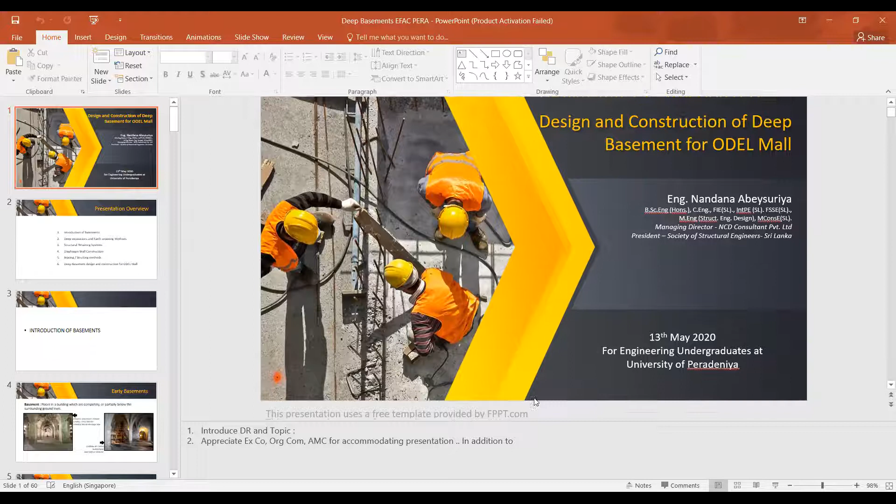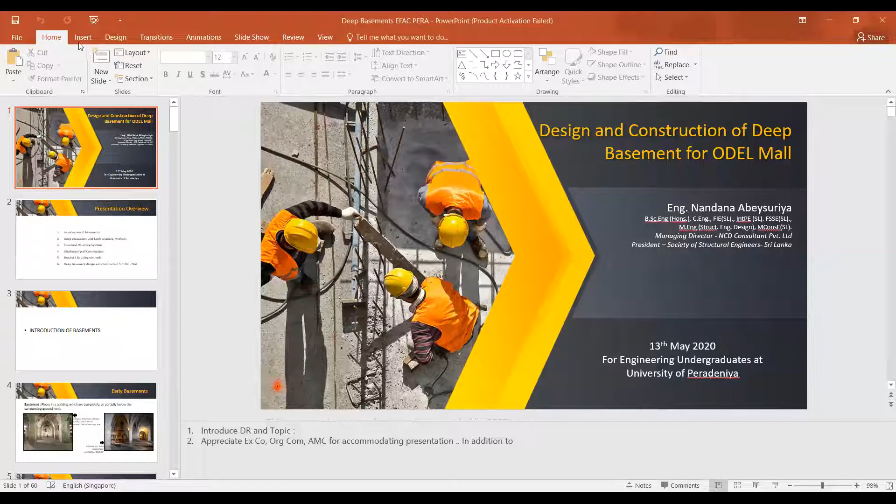Give me a few minutes. Slide show is not working. Maybe... okay, no, that is fine. Okay, can everyone hear me?

Very good afternoon to all of you. I know today the forum is about the undergraduates and also the practicing engineers, so I will mainly focus on the undergraduates, but this is very useful for everyone.

Before I go into the topic, I would like to have a little discussion with our students. Please note that this is not a lecture, and I'm not going to ask any questions at the end of the presentation, so you can be relaxed and listen to my speech. Once my presentation is over, if you have any question, you can ask also.

I'm sure all of you are waiting to complete your degree and then start your career as an engineer. Some of you may do higher studies, and majority will practice as engineers. Out of them, some may work as structural engineers, and again the majority may work as construction engineers and various areas in civil engineering.

I would like to share some of my experience and also a little advice, because your entire career will depend on the first job you are doing. I have a lot of examples, so you must try to select a good job. When I say good job, basically it is not the salary but the experience.

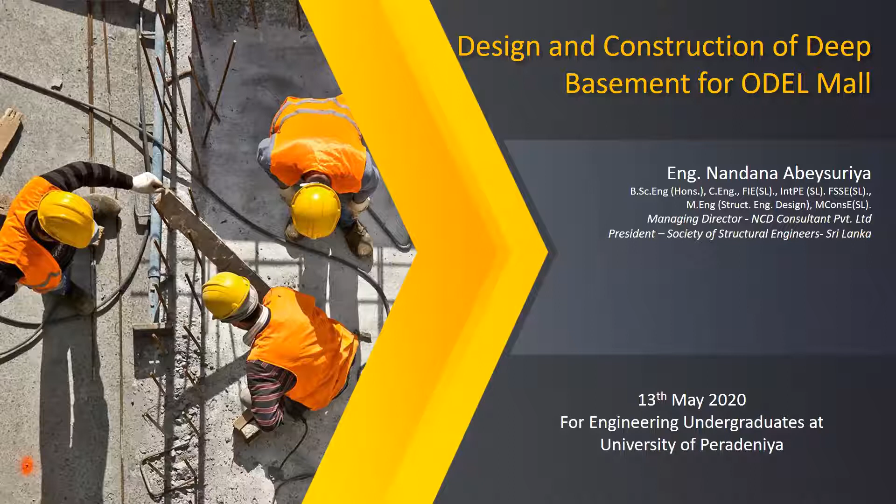Because we had not seen any 5-basement buildings in Sri Lanka, we had to go overseas and see how they do it. We went to 2-3 countries where they do this type of deep basement, but we can't do a one-to-one construction here because our conditions are different — the soil conditions are different, the regulations are different, the equipment available is different, everything is different compared to other countries. So when we got this opportunity, we did a thorough study on the constructability and the theoretical design part as well.

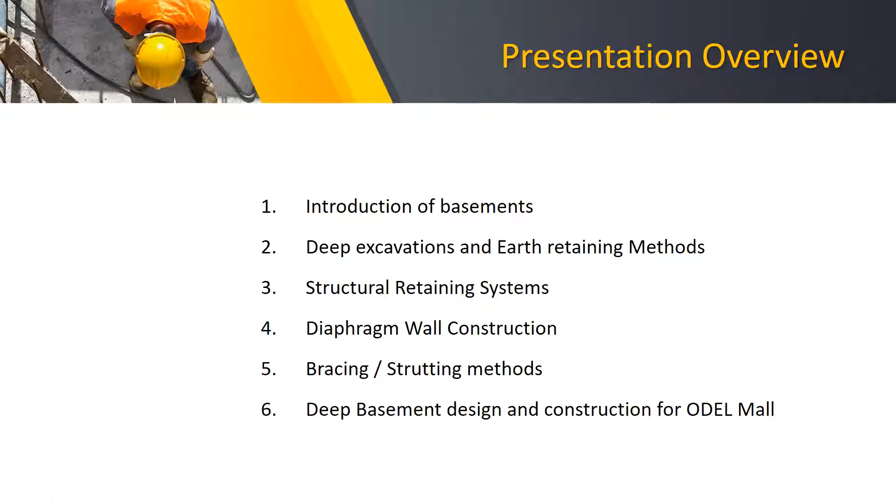For my presentation today, I would like to follow a few steps, though I might miss a few things. Before I talk about the ODEL construction project, I would like to talk a little about related areas and topics so that you will understand when I'm talking about the ODEL project. The first item is introduction of basements. Item 2 is deep excavation and earth retaining methods, then structural retaining systems, then diaphragm wall construction — that is the most important part — then bracing and strutting methods, and finally deep basement design and construction for the ODEL Mall.

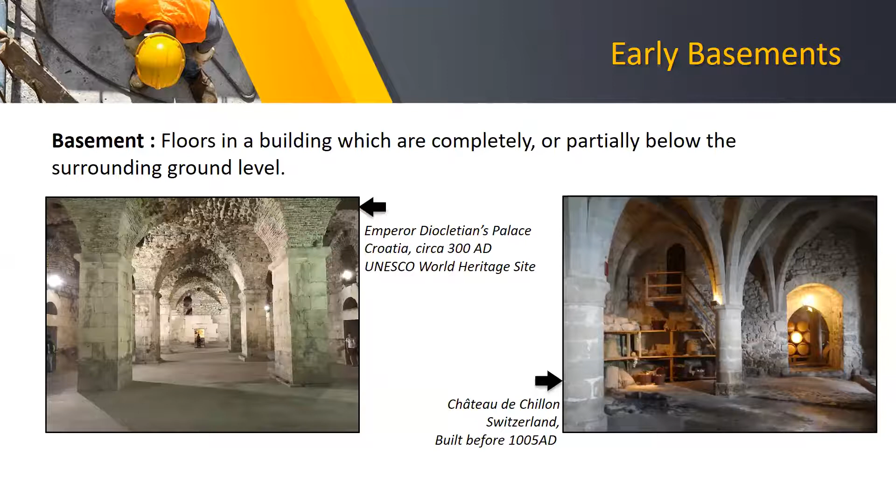So you know how the technology and the construction is happening outside this country.

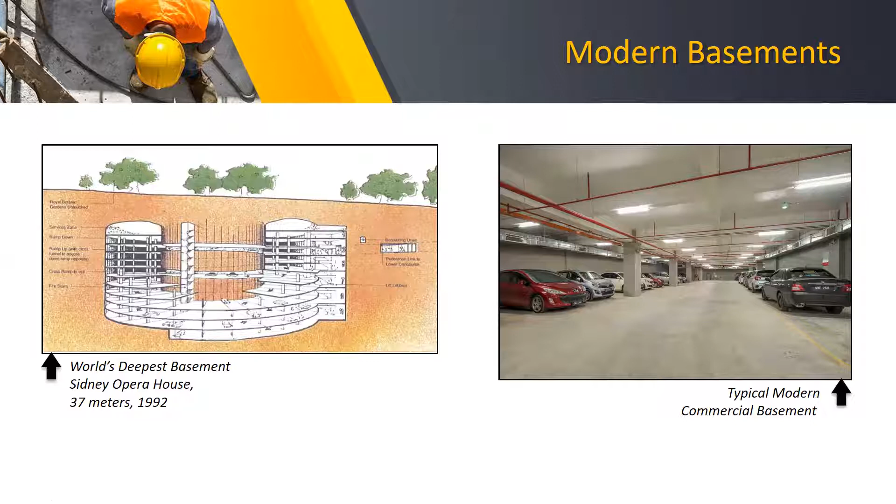When you talk about basement, the construction of the basement itself is not the difficult thing. Actually the difficult part is the earth retention systems. Before we do any excavations, we have to do protection of the outside.

To protect the outside, we have to do some retaining wall system. Those retaining walls could be temporary or permanent. Because when you excavate, you will have surrounding properties, you may have buildings nearby, and any slightest movement during the excavation phase can cause settlement to adjacent properties.

So it is not a simple approach. Therefore, when you talk about deep excavations, there are major considerations. I hope you understand what I'm trying to explain.

One is safety and stability. This safety and stability is especially important for the surrounding properties as well as people working in the basement. You may have seen in newspapers the collapsing of some shoring systems, retaining walls, and people have died - that is because the retaining wall system provided was not sufficient.

So the number one is safety and stability. Stability doesn't just mean there's no collapse, but stability of a building depends on the slightest movement, the slightest settlement. There are guidelines given for what is the maximum allowable settlement and movement, so when designing our retaining wall system, we have to consider all these things.

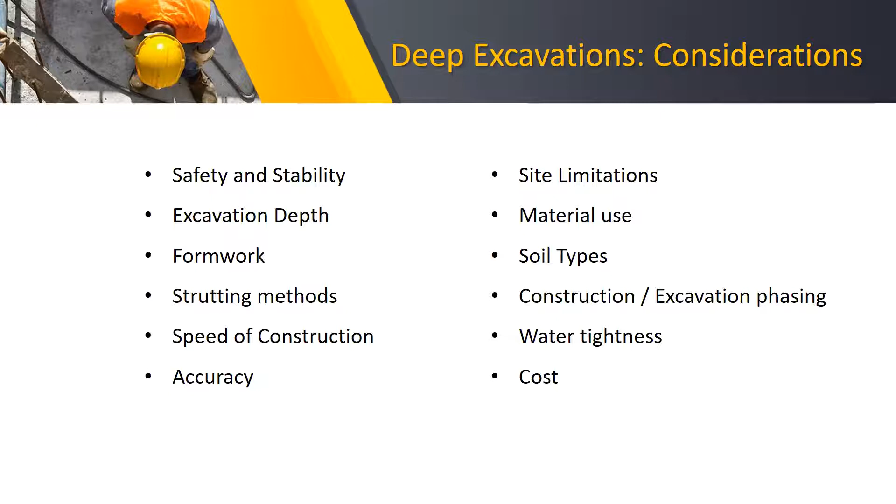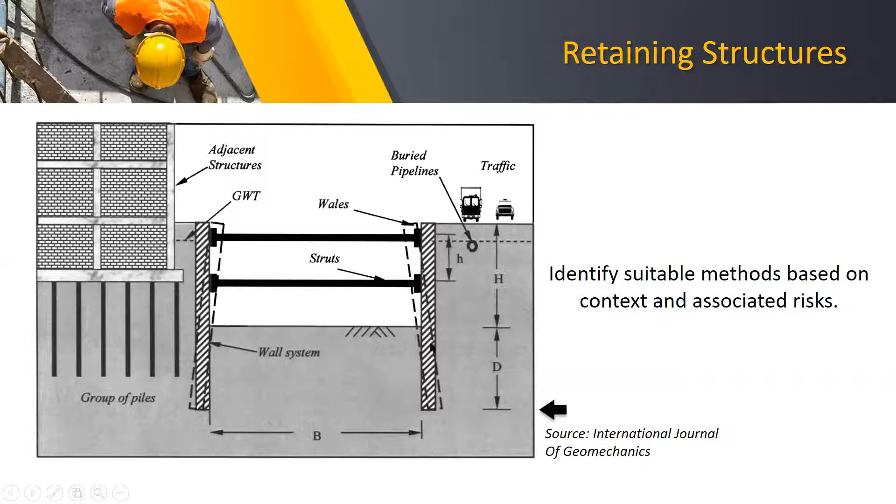We always learn from failures. This is Nicoll Highway in Singapore - you can see the scale of the damage. On the right hand side, an entire foundation has got exposed because of the failure of the retaining wall system. This building was built on the filled area, so when the retaining wall fails, this is what happened.

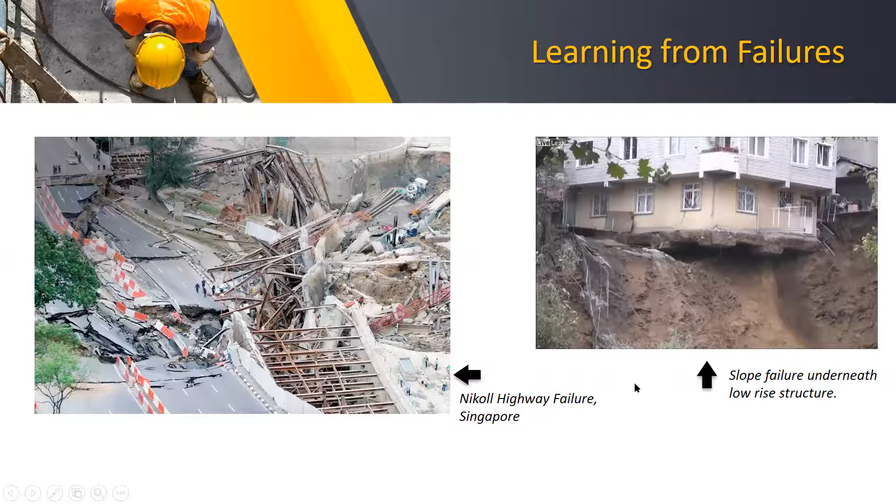After the Nicoll Highway failure, Singapore set up certain requirements. In Sri Lanka, we have not incorporated this into our regulations. I have pushed several times, but it has not happened yet. We are still trying to get all these minimum requirements established.

In Singapore now, all permanent or temporary building works involving excavation depth of 1.5 meters deep have requirements. If your excavation depth is less than 1.5 meters, about 5 feet, there is no issue getting plan approval. If the excavation depth is between 1.5 and 4 meters, a qualified person - a qualified structural engineer - should design the temporary supporting system, but an accredited check is not needed because it is only 4 meters.

But if it is from 4 to 6 meters, a qualified person should design it and submit a design report with the support system to the plan, and you have to analyze and see the deformation - I will discuss this later - and the stability of the system, which should be checked by an accredited checker. That is to make sure that even if the qualified person has made a mistake, it will be checked. We are keeping zero tolerance for mistakes.

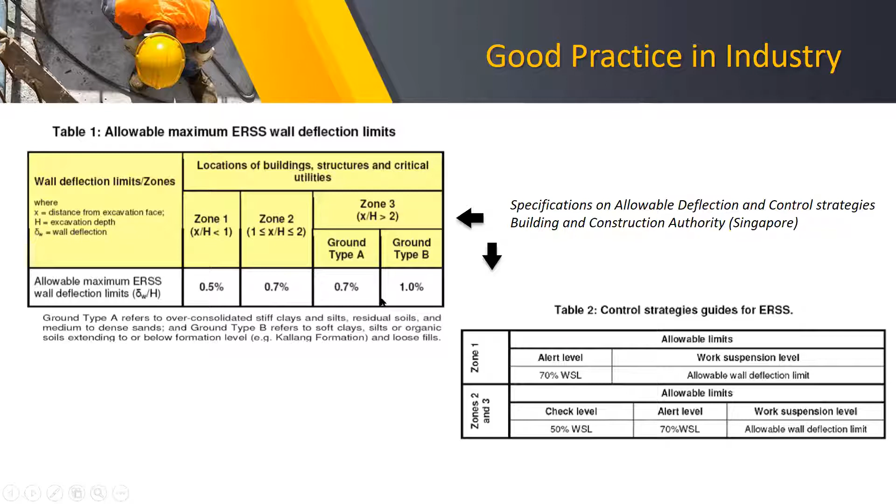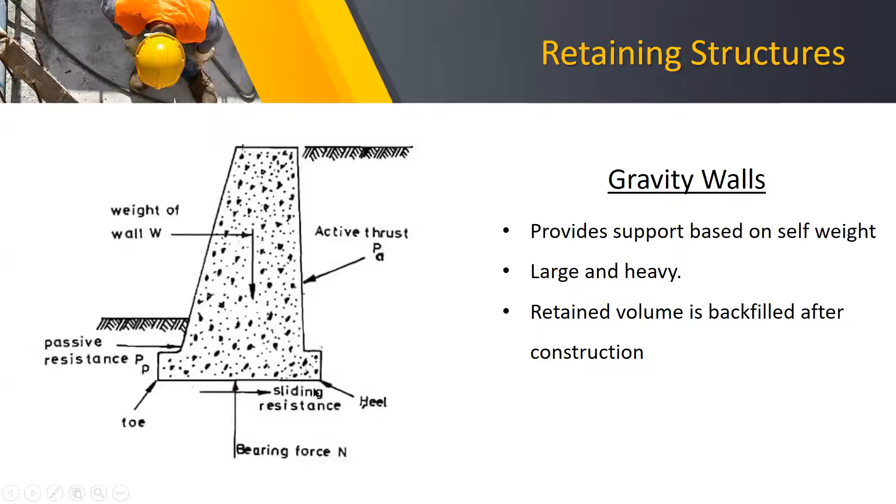The forces applied on the gravity retaining wall, I think you have done under geotechnical engineering. You get active pressure from the earth fill, then you get a passive resistance from the excavated face. You have the weight of the wall, and then you have a bearing force. So the bearing capacity of the soil should be more than the total weight of the wall. And the lateral force created by this different earth pressure should be resisted by the sliding resistance. So the friction under the underside of the retaining wall should be more than the lateral force. So these are the basic things.

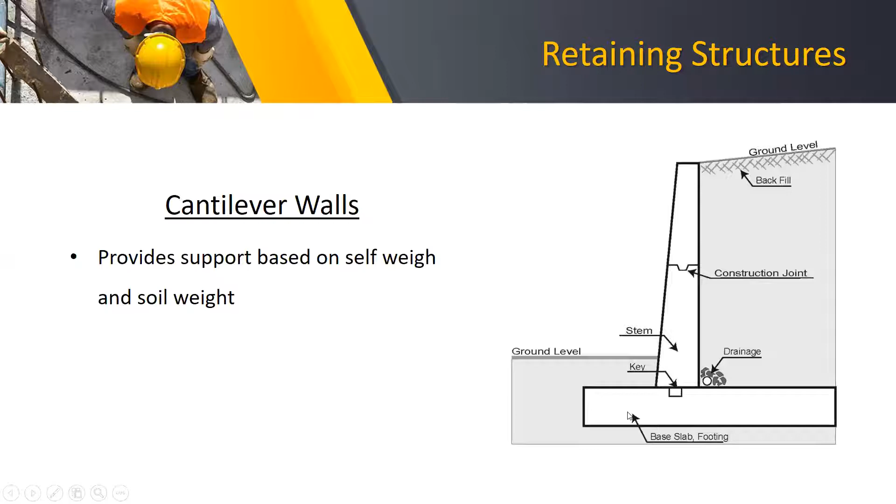If it is a cantilever wall, again on the backfill side, you should have enough earth to provide the resisting moment. So the soil, while giving lateral force, is controlling the movement.

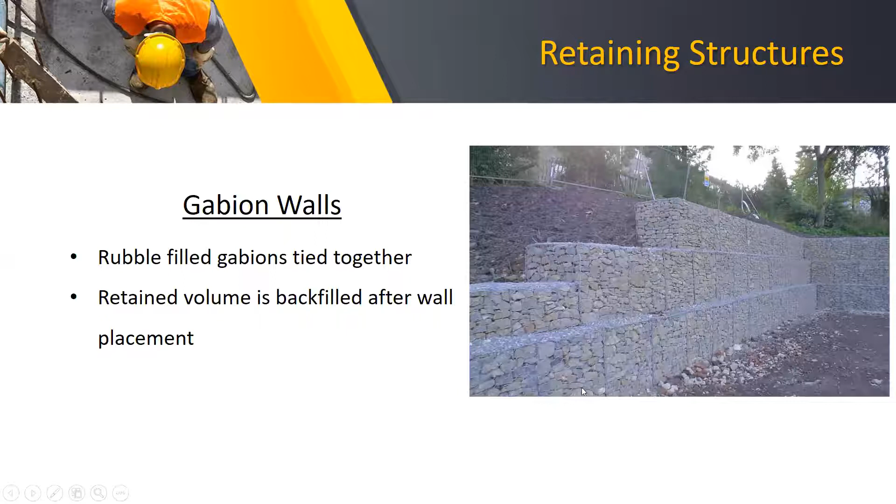Gabion wall is a flexible system. This is ideal where your ground is not very hard, and it is a perfect arrangement for draining water. So you don't want to provide weep holes because there is no water pressure building up on this gabion wall. If you are designing a retaining wall for earth pressure and water pressure, it's going to be much bigger than designing only for earth pressure. So we always try to keep the water pressure reduced by providing weep holes. So when you go for a gabion wall, there is no water pressure building up in the backfill.

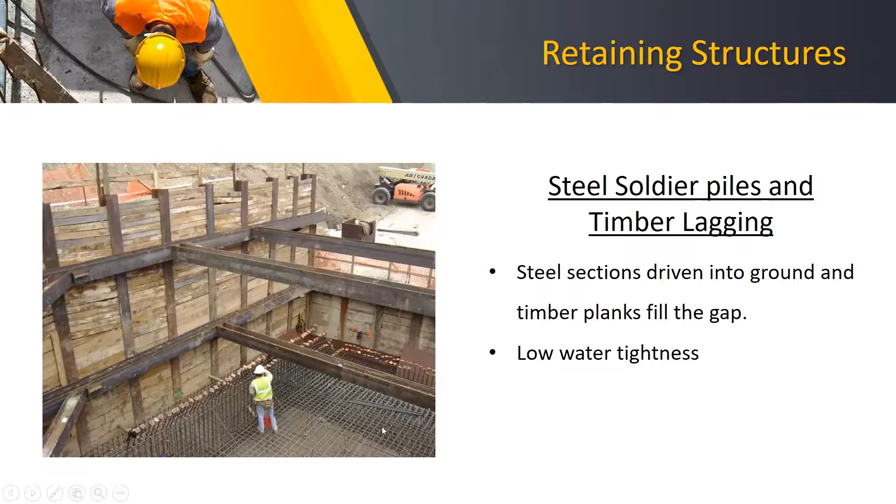And there's a thing called shotcrete wall. This shotcrete wall is also called spray concrete. You provide a mesh and then concrete. So once it is concreted, the spray concrete becomes very hard and becomes like a concrete wall.

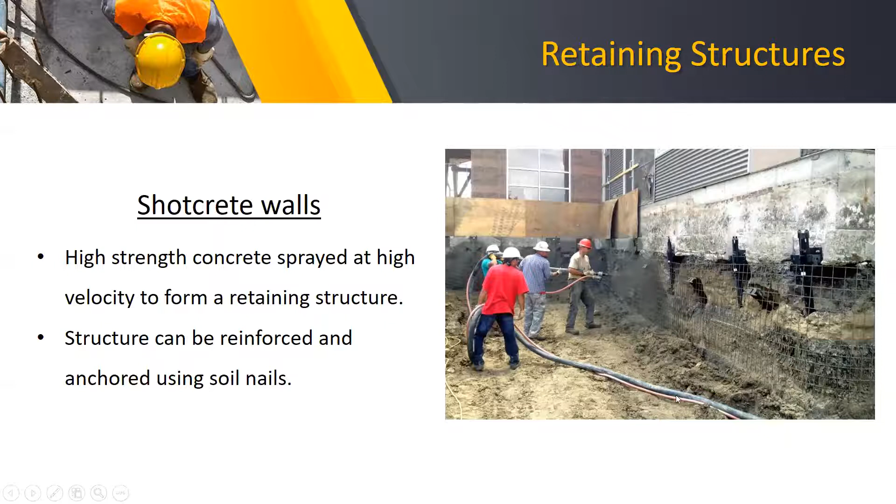Other one is a touch pile - this is the third system, touch pile, or we call it micro pile. What you do is you bore it and concrete a small diameter pile, generally about 200 to 400 millimeters in range. We are having in Sri Lanka machines for 300 millimeter, very fast boring machines. So if your basement depth is about 3 meter, 4 meter, we can use this tangent pile or touch pile.

You first bore and place this pile, then keep space for another pile, then do this, then again you can do this. Or else you can do touching, because if you follow the same sequence, you have to wait - if you do this pile today, you can't do this tomorrow. So ideally you do the next one and then come back to this. That is the arrangement when you do the touch piles or micro piles.

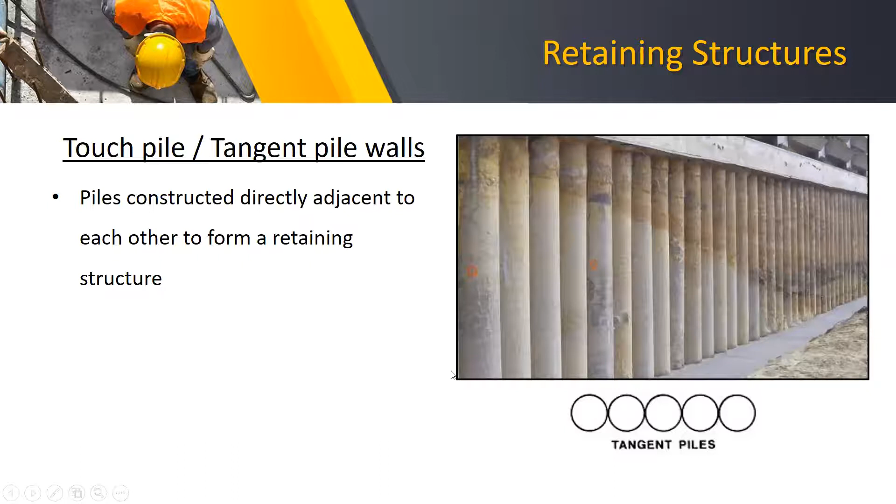Otherwise, interlocking sheet piles - I'm sure you have seen these sheet piles, which are a very good watertight system. And at the end of construction, you can remove and reuse them. So that is the advantage, especially for temporary work, you can use sheet piles.

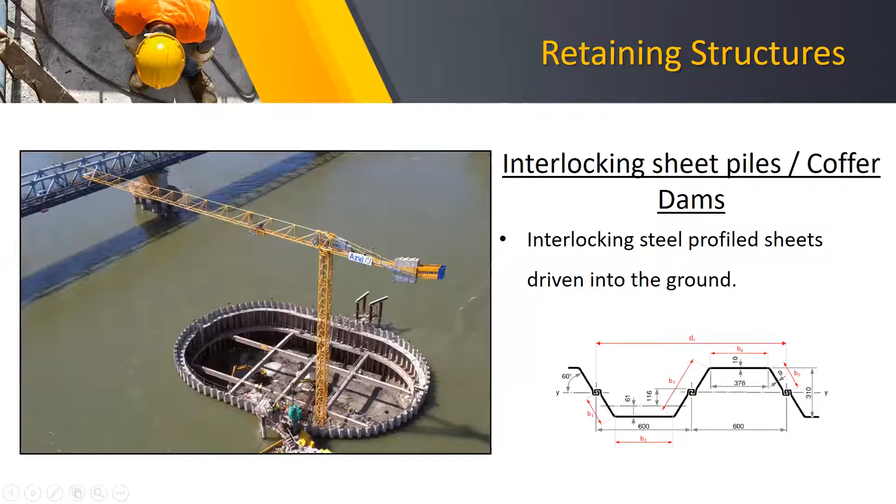And the other one is a little more advanced system called secant pile. Secant pile is also kind of a concrete bore pile, but the difference is first you cast the primary pile. What you see without the reinforcement is the primary pile. Generally, the diameter of these piles is about 680 millimeter. So first you cast primary piles without reinforcement.

After that, you are cutting - when you are boring, you are cutting part of the primary pile and then cast the secondary pile with the reinforcement. So it is obvious that the reinforcement provided for this secondary pile must cover from this point to that point. Can you see my cursor? Dr. Budmekar, can you see the cursor? Yes. Okay, so from this point to this point area, the total earth pressure should be designed to be taken by this secondary pile. This is a good system, only thing is it is time consuming.

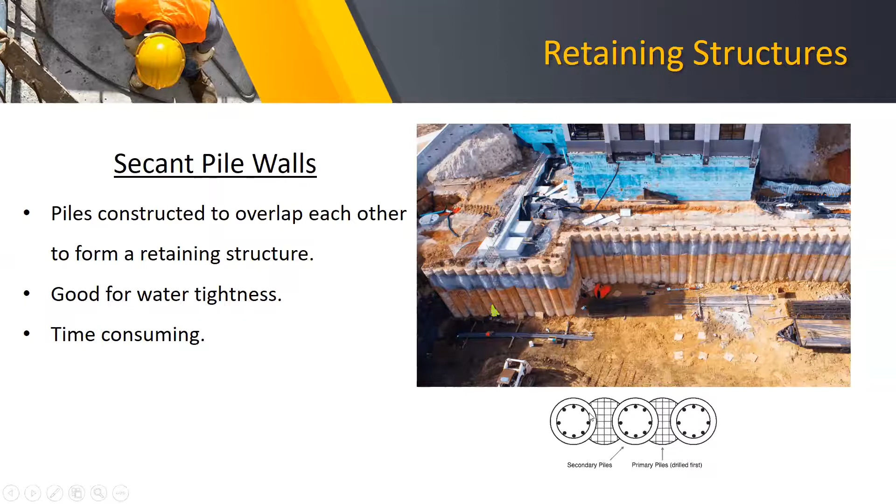And then diaphragm walls. Actually, a diaphragm wall is also like a bored pile. If you haven't heard about diaphragm walls before, think of it like casting a normal pile, only thing is it's a wall.

At once we cast a complete wall, 3 to 5 meters long, up to the hard rock. Suppose your hard rock is at 25 or 30 meters, at once you concrete the whole wall, about 3 to 5 meters long, but to a depth of 30 meters. You have to first excavate the wall up to the hard strata, that is rock, then lower the reinforcement cage, then concrete.

So imagine if you can concrete a wall 3 to 5 meters in a day, this is a one-day operation. You can't excavate today and come back tomorrow or the day after to concrete. If you start in the morning, you have to complete the whole thing. So the advantage of diaphragm wall is that it's very fast and also cost effective. If you compare the cost of diaphragm wall against secant piles, diaphragm walls are cheaper, and you get a perfect finish as well.

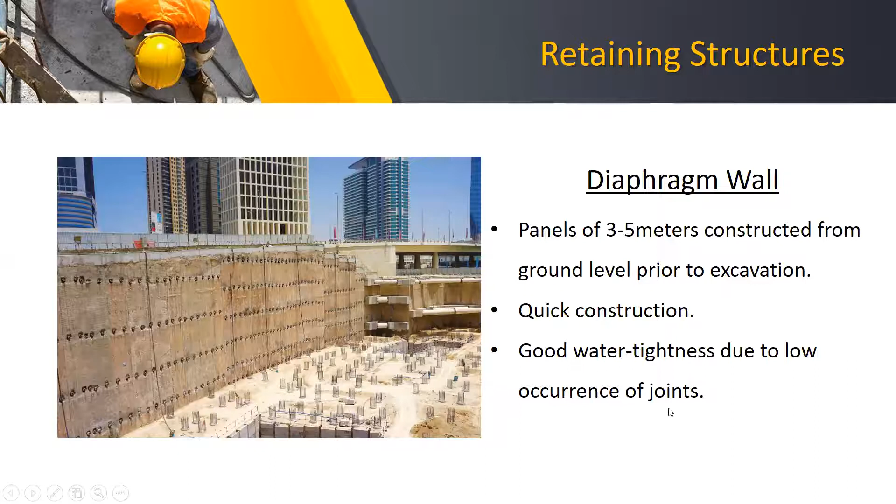And the progress is very good because every day you can concrete about 3 to 5 meters. Now we are going to talk about diaphragm wall construction, because for deep buildings, deep excavation, when you have a deep basement, you don't have any other option. This is the most popular option all over the world for deep basement construction.

So when you talk about diaphragm wall construction, there are a few jargons. You call diaphragm wall a D wall. Then when you cast, let's say 5 meters, suppose the total length of your basement excavation perimeter, you are basically doing the diaphragm wall along the perimeter.

And the beauty of this diaphragm wall is the thickness is about 600 millimeters. Generally for 5 basements, 6 basements, 600 millimeter thick diaphragm wall is sufficient. And the total space you require from the boundary is 1 meter. So especially for narrow sites, diaphragm wall is ideal because you are only using 1 meter. Within that 1 meter you have the diaphragm wall, and another advantage is that the diaphragm wall itself is the permanent wall - you don't need any other wall. You can have a skin wall, but the diaphragm wall is a structural permanent retaining wall of the building. So you are saving a lot of space when you go for diaphragm wall.

So some of the terms I will explain: trench wall, straddle wall, clamshell excavator, guide wall, stop end, and cut-off wall.

When you cast the diaphragm wall, at the two ends of the wall you have to provide a stop end, because you have to provide a water bar. So today you concrete 5 meters, and if you're going to concrete the next 5 meters tomorrow, there's a great chance of water leaking through the construction joint because there's no connectivity. Therefore, we insert a water bar so the two walls are connected and there is no water leaking.

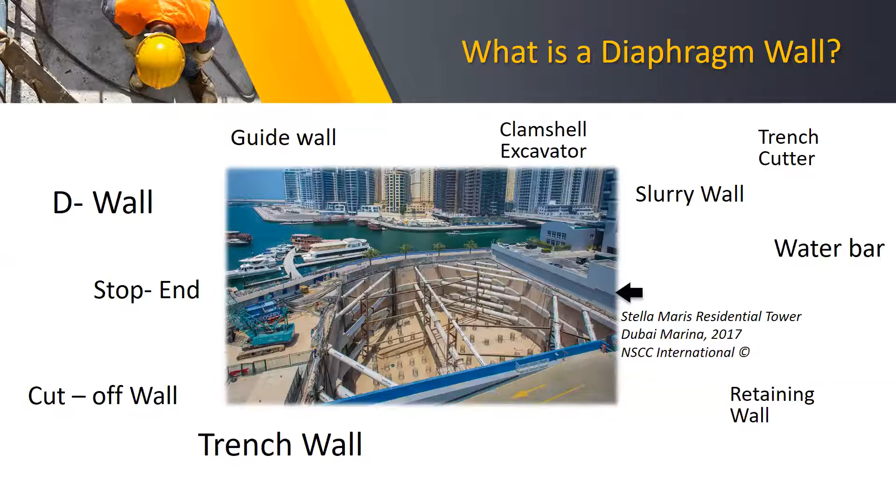This water bar connection is done with the stop end, which is a steel section. We insert the water bar to one side and then lower it. Later, once you remove the stop end for the next day's concreting, the water bar extends into the next wall.

So let me explain the guide wall. Now this is called the clamshell excavator. You need a crane to lower the reinforcement cage. You can lower the whole cage, or if it's very big, you can do it in pieces, or use two cranes.

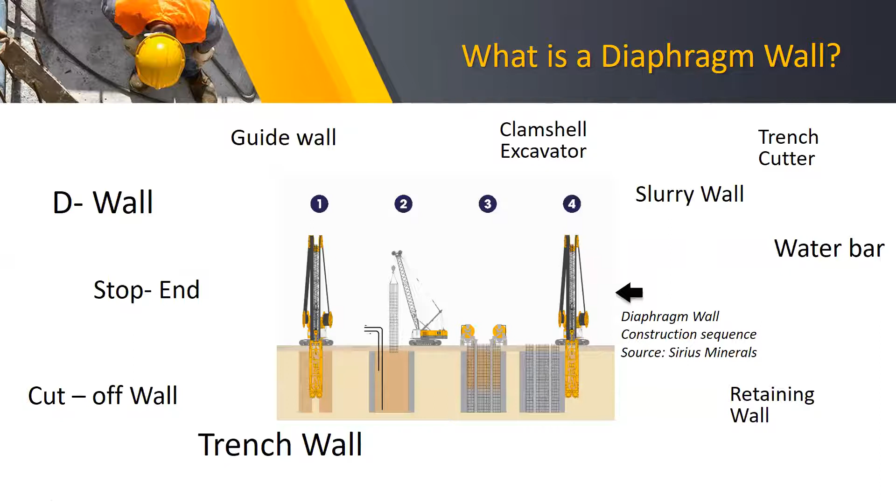Remember, if the depth of your diaphragm wall, the depth to rock, is 25 meters - because in Sri Lanka, in Colombo, in most areas you find bedrock at 25 meters - you have to prepare a reinforcement cage 25 meters long. So when you have a 25 meter long cage, you need a fairly big, good crane to handle it.

So if I just quickly go through the feasibility or advantages: formwork guide wall at ground level ensures initial alignment. So when you are using the clamshell to excavate, we have to make sure you are going along the exact theoretical line. For that, before you do the diaphragm wall, we have to cast a guide wall, a concrete guide wall.

So the machine, the clamshell, is going in between - this is like a trench, a bottomless trench. So you can position the clamshell and excavate so that the movement will be less than 10-15 millimeters, because the guide wall gives about a 10 millimeter gap.

The speed of construction, as I said earlier, is about 3 to 5 meters, and accuracy is 2%, so we can work within 2% accuracy. Materials use less concrete, because secant pile goes about 800 millimeters and needs more concrete. Soil type is more suitable for stable soil profiles. Water tightness is better because you get a joint only about every 5 meters. If you go for secant pile, every 800 millimeters you have a joint. So when you have more joints, you have more problems; when you have less joints, we have less problems.

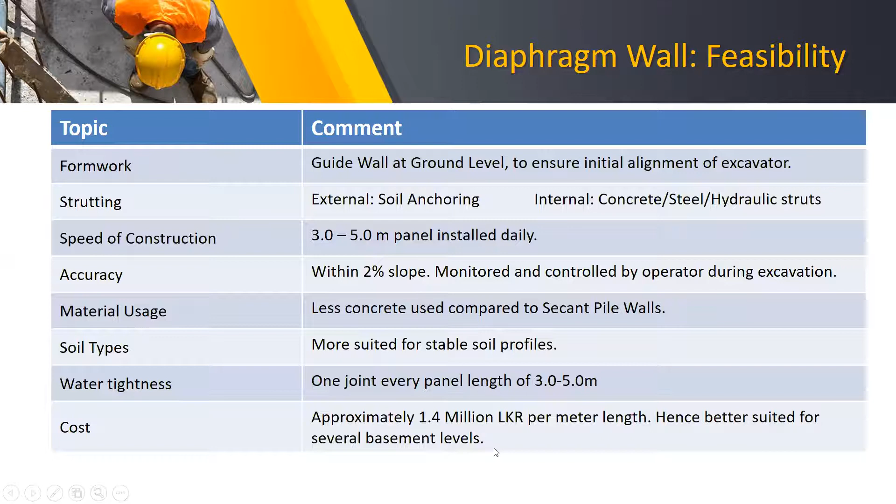Generally what you do is first cast the guide wall around the perimeter of the proposed basement area. When designing the diaphragm wall, you can't design it standing at 15-20 meter depth. We can design maximum 4 to 5 meters or even 3 meters, assuming there are lateral supports at every 3 or 4 meters. Only then is the diaphragm wall, or whatever the system, economical.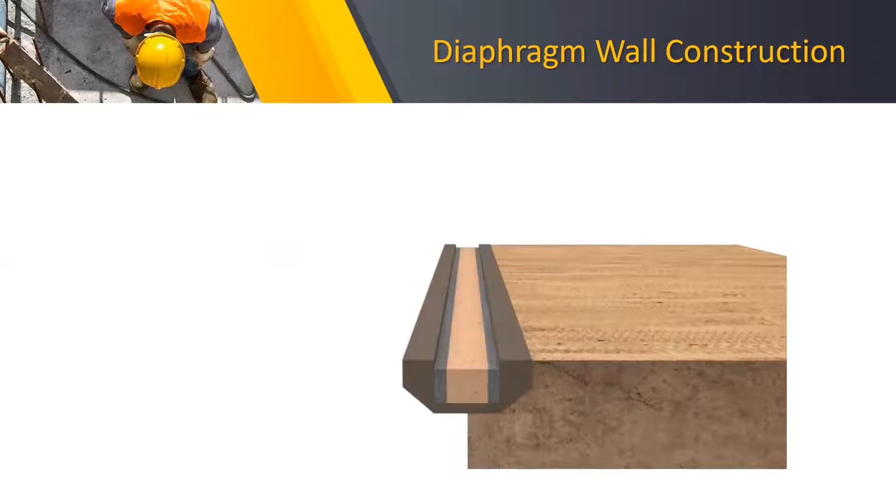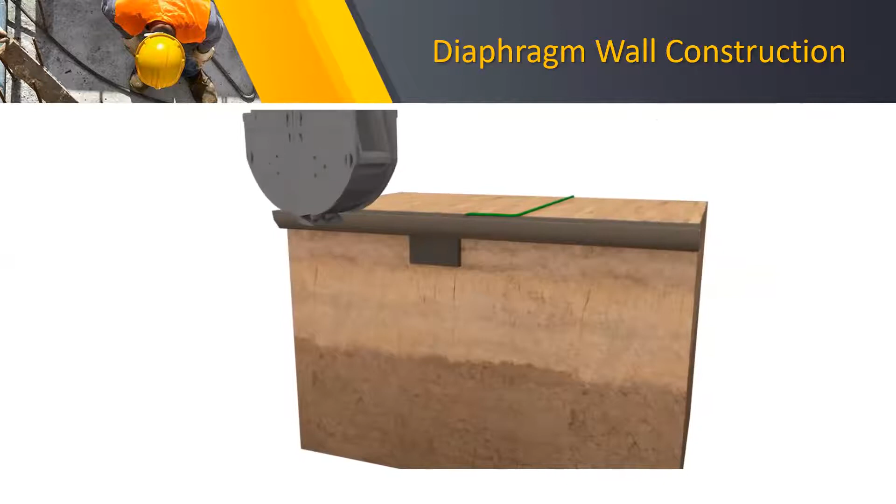Then the clamshell is lowered, it takes the earth, and it is put into the truck. So you are going through the loose soil. This is exactly the clamshell. You excavate, but with the clamshell you can't excavate 5 meters at once; it can excavate about 2 meters with its size. So you have to do this operation, lowering it a couple of times to get the required width, or rather length, of the diaphragm wall.

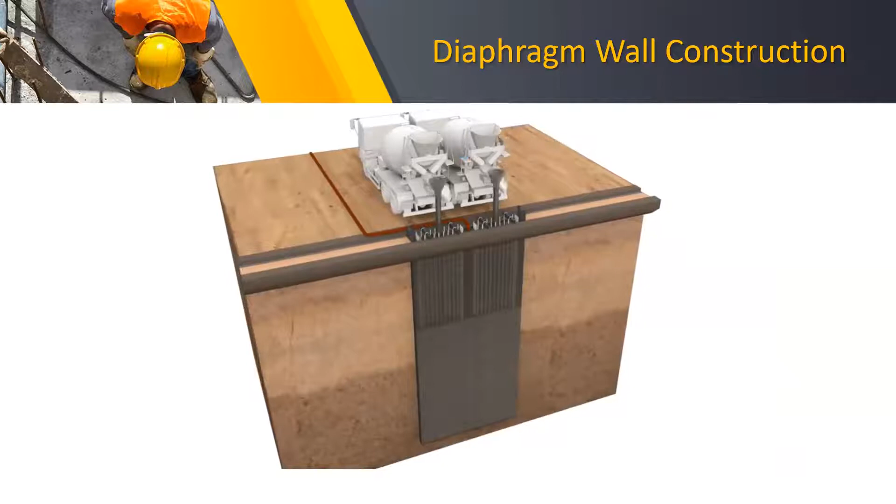Now remember this is like piling, so you have to provide bentonite slurry during the excavation process to keep the site stable. Then you lower the reinforcement cage, and then you concrete it. So this is basically how you construct a diaphragm wall.

So you can see the guide walls are still remaining, and this is the stop end. As I said, the stop end has to be removed when you do the next panel.

For strutting methods, you can use steel struts. For this first set of struts, you excavate about 1 meter. We have to design this actually; we can't simply excavate 1 meter. In the design process, you assume that after excavating 1 meter, you have a lateral bracing system. Then after excavating another 3 meters, you have to fix a second set of lateral bracings.

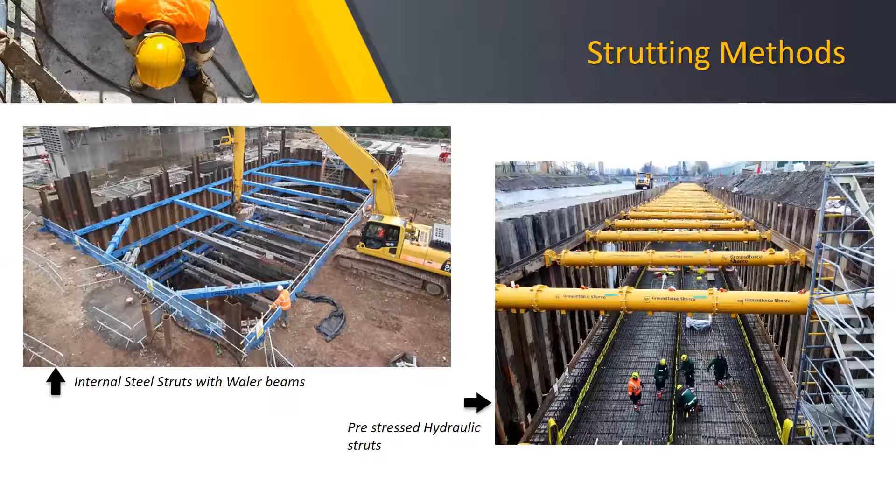These are advanced systems where you can use pre-stressed hydraulic struts. So if there's a movement, you can pre-stress and get back to the safe line. If you don't use lateral bracings, you can do soil anchoring, but you're doing this in somebody else's property, so you have to get permission. If you have buildings close by, you don't get permission to do the soil anchoring. But if you do this ground anchoring, your space is free for excavation, and you can do very fast construction because you don't have lateral bracings.

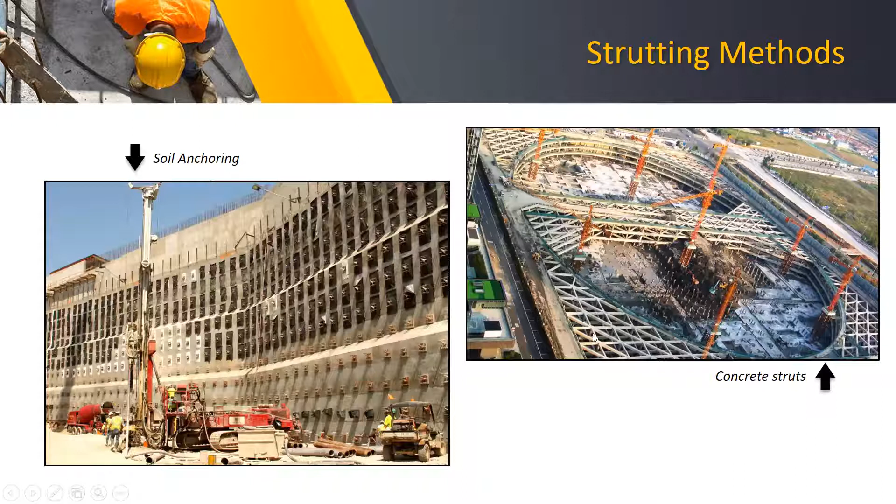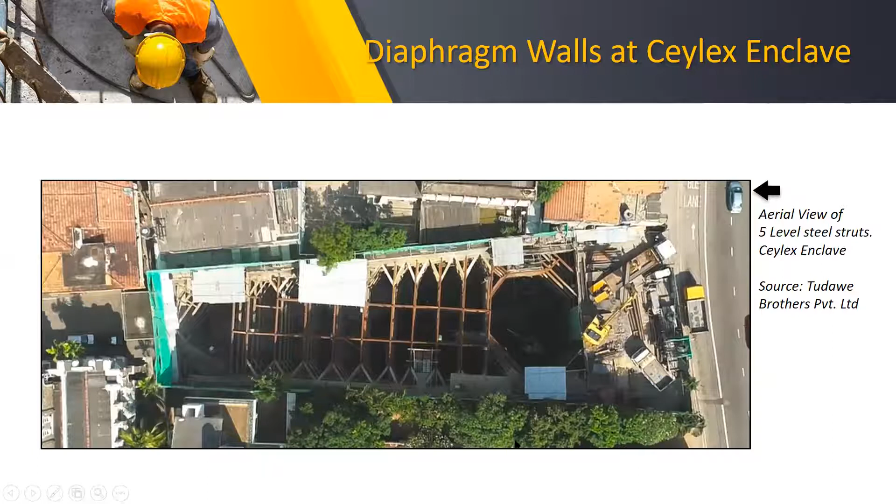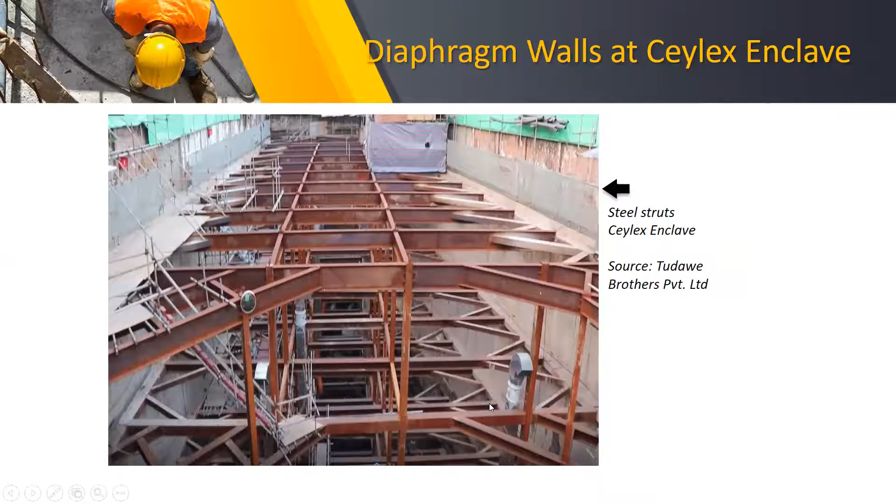Okay, now we are going to talk about our main topic, that is deep basement design and construction for hotel mall.

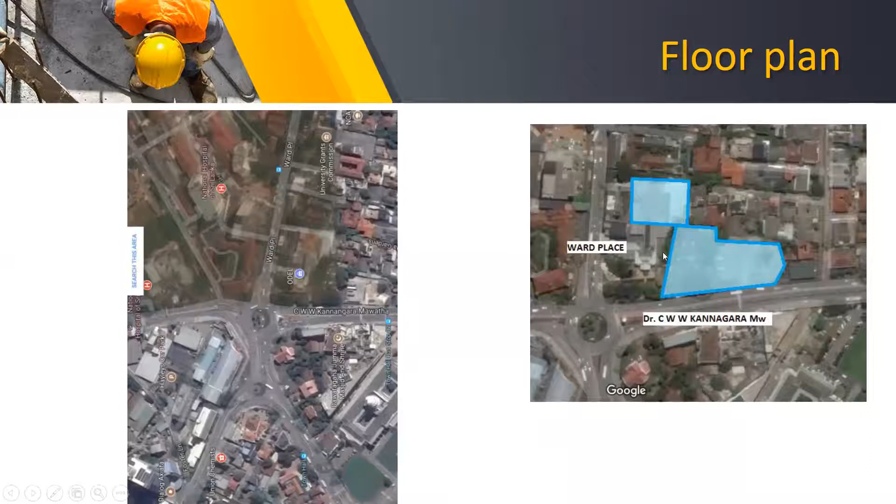What is shown in blue color is the proposed building. This part is phase 2, which has only 1 basement, and this is the building which is having 5 basements.

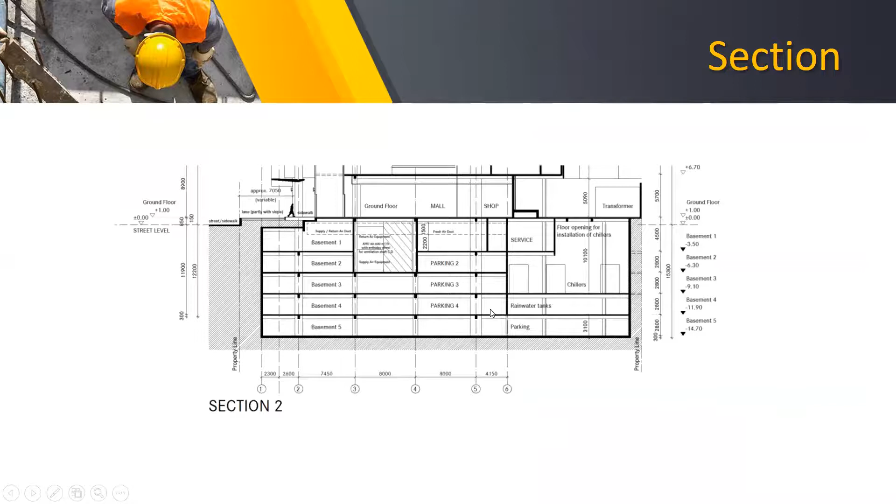You can see now this is a picture showing the situation after completion of the excavation. What is shown here is the diaphragm wall, and this is the excavation. But what he has not shown is the bracings, so you have to imagine that there are bracings.

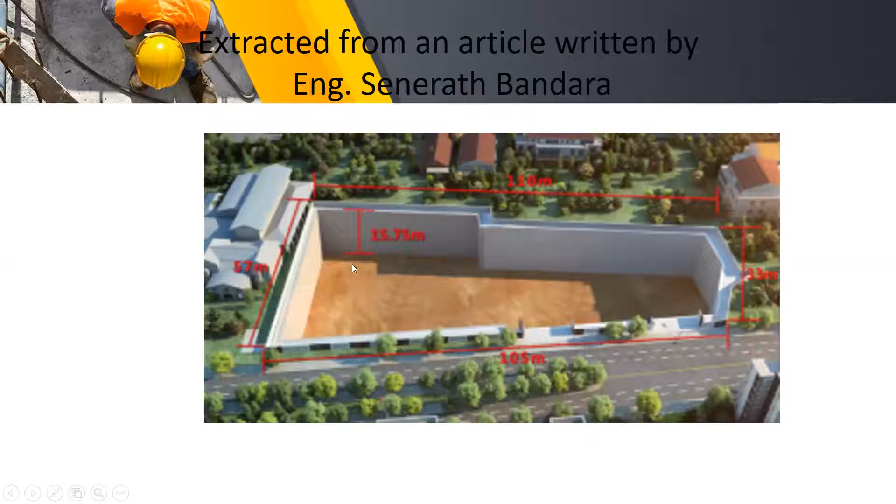Another challenge we had to face was that Odel did not want to sacrifice their parking, because the customers are number 1, the construction is number 2. They told us very specifically 50% of the area should be available anytime for their parking. So imagine you are going to do a 5 basement building, but anytime you have to give 50% of the area for parking. How do you do that?

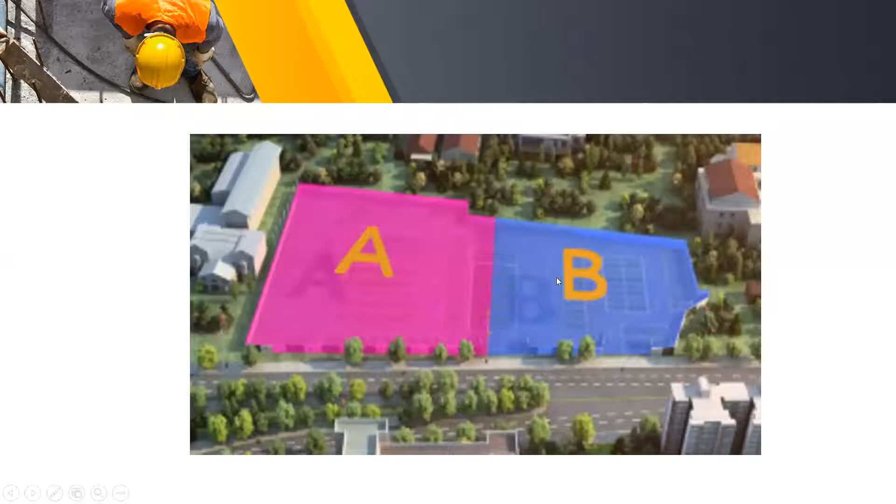So we decided we go for 2 zones, not phases but 2 zones. First of all, you complete the diaphragm wall, then you have piles. This building is sitting on piles. In addition to the load-bearing piles, we had to do additional piles to support steel king posts. King posts are there to support temporary work. So in our lateral bracing system, although the lateral bracing system is concrete, we have given vertical support with steel king posts.

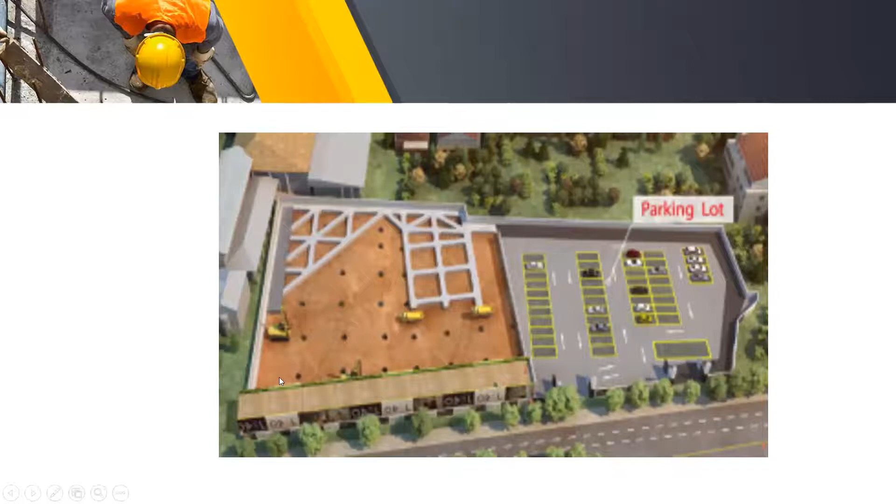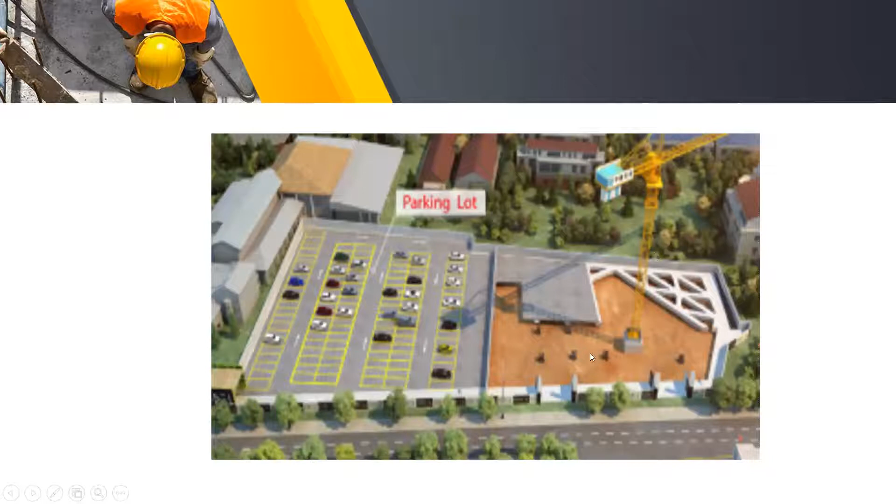We have done a suspended slab at ground level sitting on the king post to support the car parking. So while the vehicles are parked here, we do the excavation underneath, and we finish the excavation. We finish completion of all the basements, and when we come to ground level only, we remove this. So while we are giving parking, we use this area for excavation. Then once that is done, you go into this side, excavate, remove the slab, and do the construction.

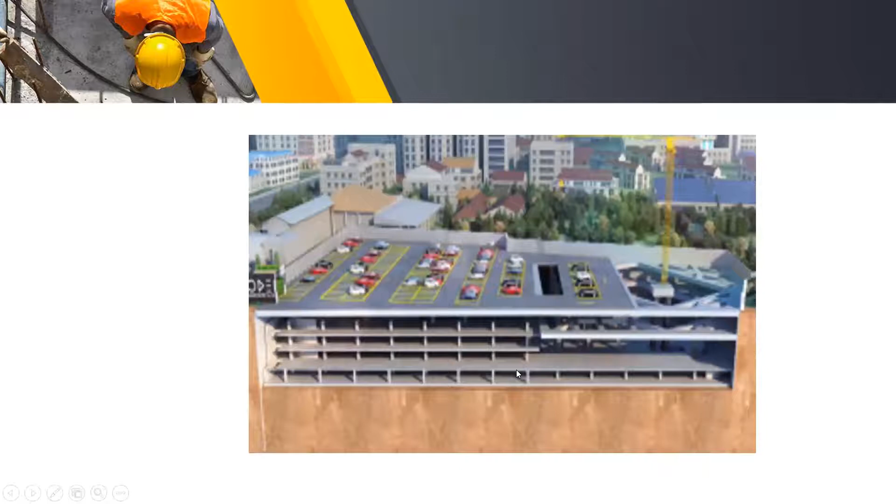So this is another artistic view, I think, of how it is going to be during the construction phase.

All of you are civil engineers, and I know you are very good in geotechnical engineering. Now, in basement construction, 90% of our job is designing the diaphragm wall, because designing the building with concrete floors for car park or whatnot is not a challenging thing.

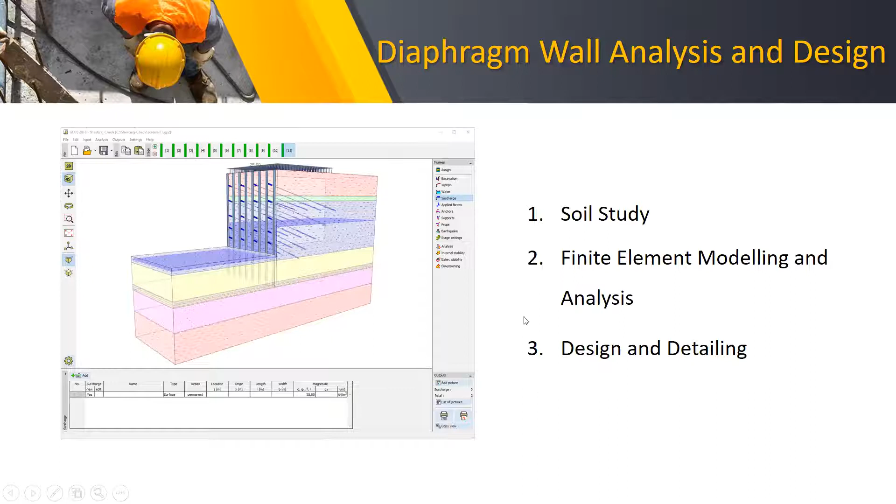It is a standard design procedure, but designing the diaphragm wall while ensuring all the limitations and serviceability limits are met is a challenge. So we have to do a thorough study of the soil, and we have to do a finite element model. We use Plaxis, the software. You have to model the whole thing, not only the excavation depth, you have to go further down up to the rock level, you have to model the soil interaction. Then you have to analyze and then design.

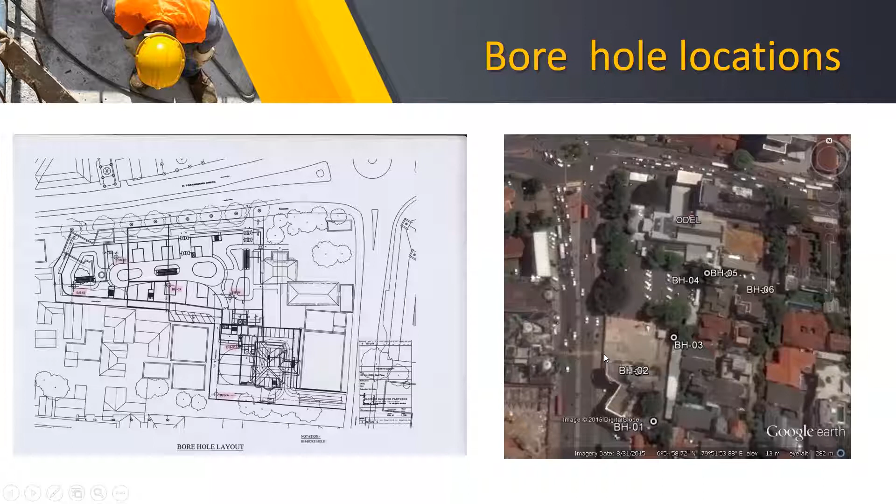So we did boreholes representing the entire site. You can see BH1 to BH6 in the area. As you know, borehole results are not identical. Remember, borehole results are not identical. If you see from borehole 1 to borehole 4, up to 6, at different depths the layer arrangement is somewhat different, but not a major difference.

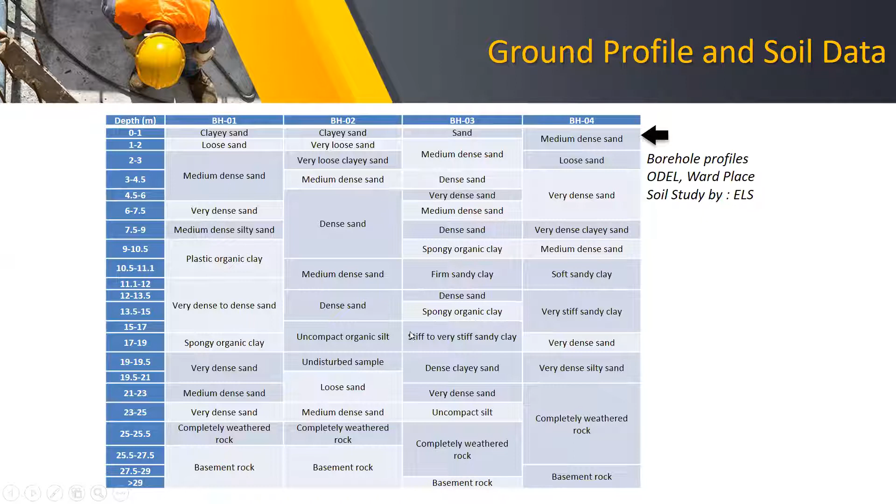You get loose sand, plastic organic clay somewhere, and on another borehole you get medium dense sand. But when you are designing a diaphragm wall, you can't design various types of diaphragm walls. You have to design one diaphragm wall which is suitable for every part of the site. So we have to see the best representation out of all these boreholes to select for the diaphragm wall design. So we have taken the best representation.

We are using a Mohr-Coulomb model, and we need to check whether it is drained soil or undrained soil. Then you should calculate the unsaturated unit weight, saturated unit weight, permeability in the horizontal direction, and permeability in the vertical direction.

Remember, we are excavating almost 17 meters, nearly 15 meters below the water table. There is a chance that water could come in because when you are excavating, you are creating a big water pressure. With 15 meters of water pressure, what is the water pressure? About 1.5 bars.

So the permeability is controlling the seepage. We have to get more accurate information on the vertical and horizontal permeability. Then the Young's modulus is required, the cohesion coefficient is required, and then the friction angle is required.

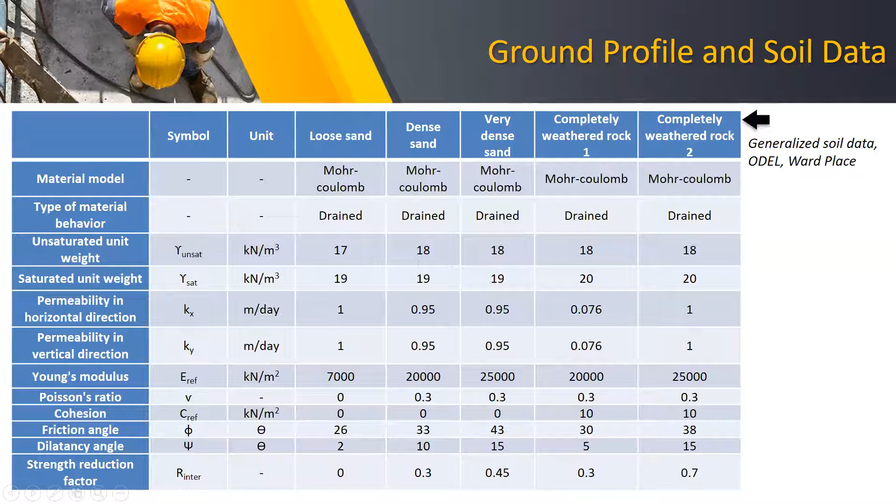Strength reduction factors are required too. You don't find all this information in the soil investigation report, so we have to do a little literature review to find certain other factors. And remember, now the design process analysis continues.

As I said, we have to do a model, various models, applying various conditions. One is the stage construction - this is a good example where construction is seriously considered in the design process. In most normal cases, we design and leave the contractor to construct, but here we have to seriously consider the design sequence and construction sequence, following it in the design process, and make sure the contractor follows the same sequence.

So first we assume we excavate 4 meters, because this diaphragm wall is so strong that it can act as a free cantilever while keeping deformation and other limits within range. You can excavate 4 meters without any supports. Once that is done, we do the first analysis for excavating 4 meters. Then you provide support at the 0 level, and excavate another 4 meters, that is about 8 meters.

So you excavate 4 meters, then provide support at the ground level, then excavate to 8 meters, then provide the next support at the 4 meter level. Then you excavate another 4 meters, then provide the next support. So you always excavate 3 or 4 meters, then provide a support, all the way down to the bottom level of excavation.

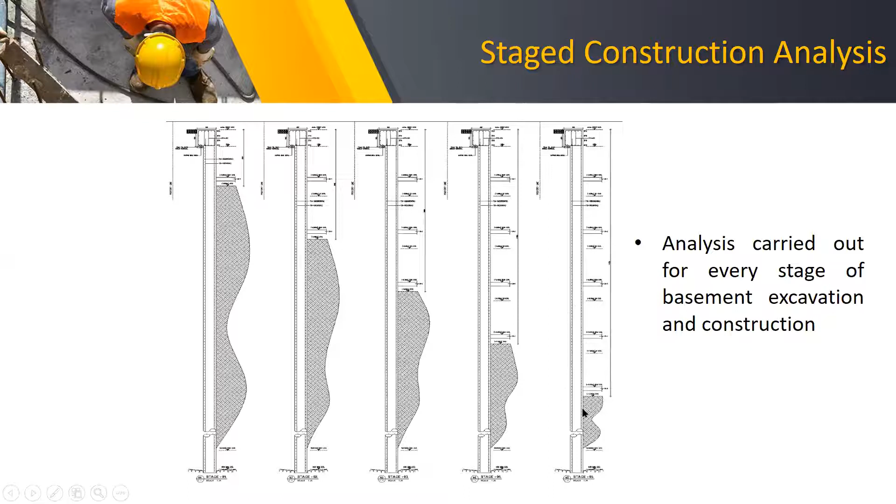So there are two cases: the moment you construct basement 4 is one condition, and once you remove the support is another condition. Obviously the second case is more critical. So the construction sequence should also be modeled, and all these load cases we have to run to see how the diaphragm wall deforms.

Now what is shown in the blue color is the diaphragm wall. I think I may have to take a little extra time - Dr. Budnik, is it okay? Yes, yes, please go ahead.

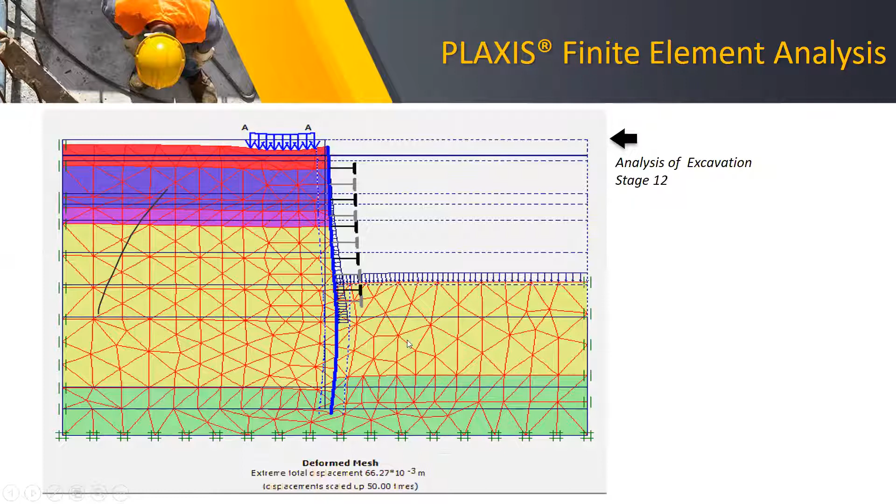So now we have modeled the soil, and these are the supports, the lateral supports. We model all these cases and get the reactions at every support, because there are two things: one is the designing of the diaphragm wall, where we check reinforcement design, shear, everything. For that we must know the bending moment, the shear, and the deformation as a safety check.

And again, since we are providing lateral supports, we must know how much load is applied on the lateral support. For the first level of support, the total compression applied varies at different sequences, so we have recorded the reactions at each strut and need the maximum value, because at one stage, taking this temporary support 1 at the first level, you can see there is 66 kilonewtons.

You can see at stage 5 you are getting 66 kilonewton. So after that it is going less, but still you have designed the lateral support system for 66. The second lateral support, we are not doing this typical supporting system for all the levels. Second level, you should see, which is having 102 kilonewton at stage 6. And then again 114 at stage 18 and 19, so we have to design for 114 kilonewton. So like that, for all the levels you have to design for, you have to get the maximum value. Again, you are checking for construction also, so we are getting the maximum values and design.

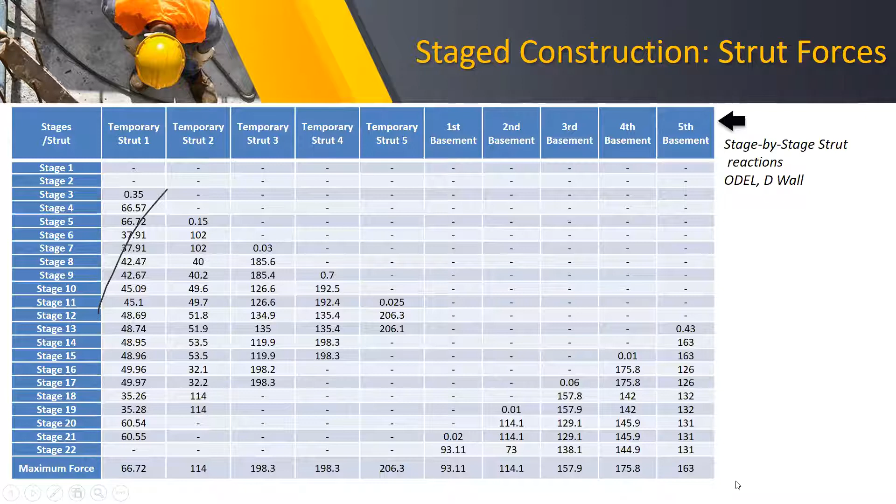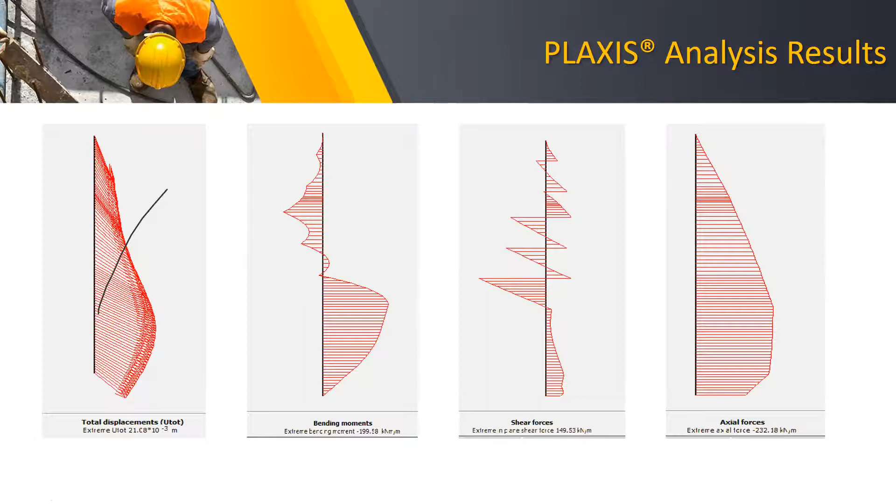So outside face you have water, so you have to design and check for crack width as well. Because it is water retaining, you have to design it like a water retaining structure. Generally, for normal design, your crack width you can limit up to 0.3 millimeter. But since the diaphragm wall is acting as a water retaining wall, you have to design for 0.2 millimeter external face crack width. And also we have to consider thermal cracking and shrinkage, and design for the ultimate limit states.

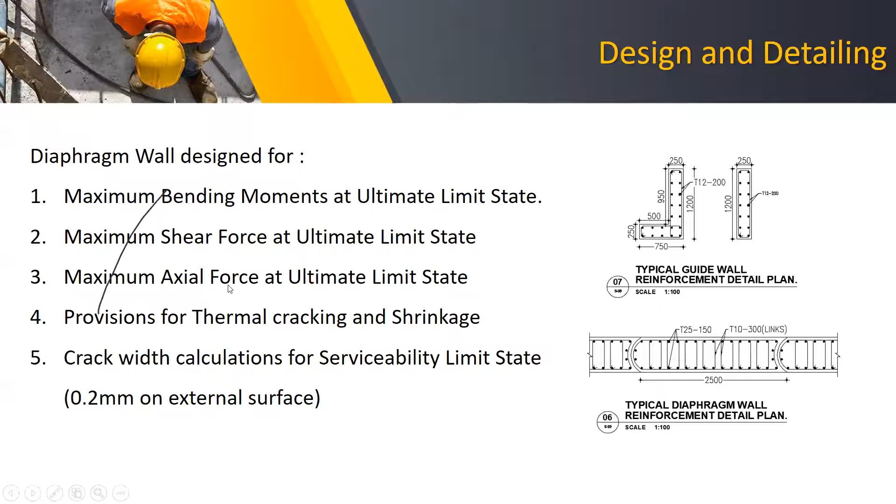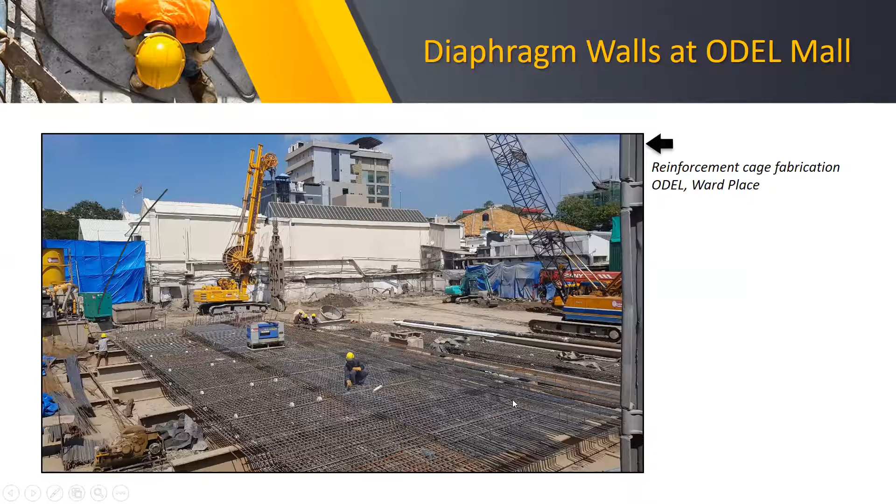This is the guide wall. So casting of the guide wall, and you can see the reinforcement cage. You need some sufficient area to fabricate the complete cage. Can all of you see this reinforcement cage? So this is for one diaphragm wall, and there are two cages.

And I'll show you a little practical excavation of the diaphragm wall at ODEL site.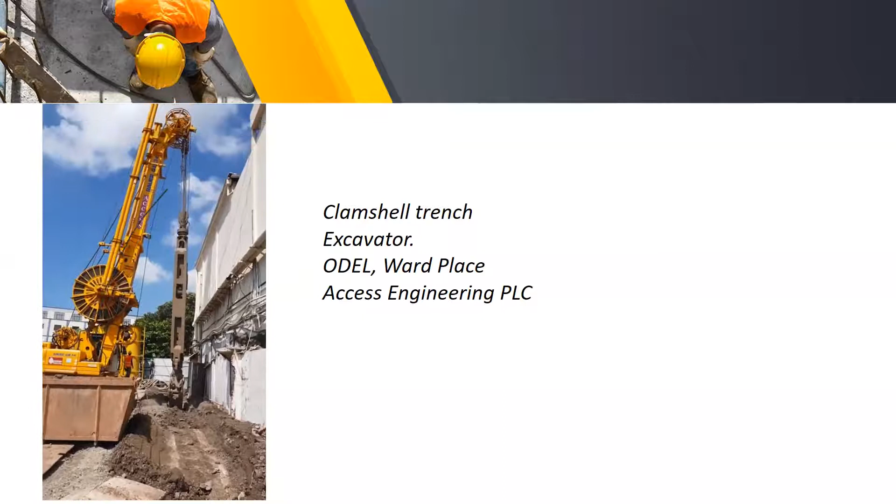When we design the diaphragm wall, you take certain safety precautions and consideration, and during construction we have to monitor and make sure that those deformations are within the limit. So we have certain tools, one is the inclinometer reading.

The inclinometer is to make sure that the diaphragm wall is done within the vertical surface. The verticality of the diaphragm wall is checked during the excavation, from the clamshell itself. But when you do the excavation, whether the diaphragm wall is moving or not is measured from the inclinometer reading. We have to regularly take the readings and compare with the first reading to see whether it is moving. This has to be done at every 1 meter of depth, so we have to insert these pipes during construction for inclinometer reading.

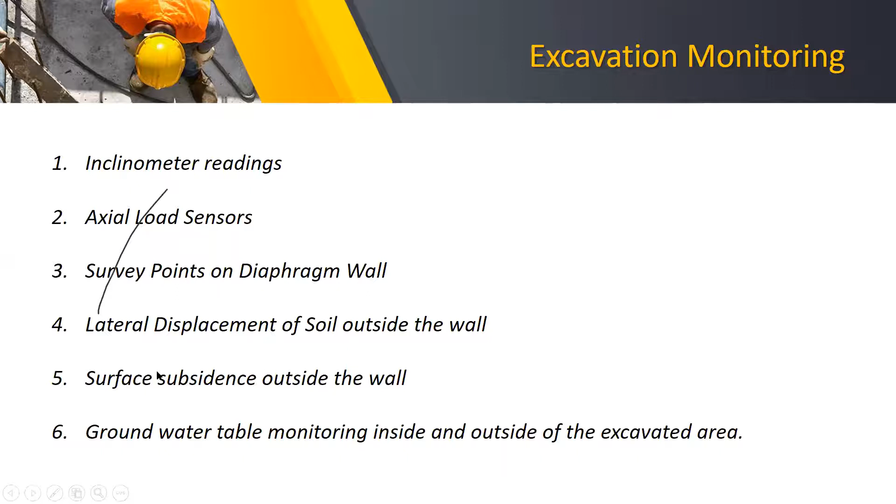And then you get axial load sensors, to check the axial load, and survey points on the diaphragm wall. In addition, we have a lot of survey points that we check regularly to monitor movements. Lateral displacement of soil outside the wall is also monitored, and surface subsidence outside the wall, because we have to check the groundwater table. Now when we are excavating, we have to dewater within the basement area, and that should not cause lowering of the groundwater table outside. So we have wells outside closely monitoring whether the groundwater table is varying, because if there are buildings, especially on shallow foundations, the building can settle if the groundwater table goes down. So we are checking the groundwater table outside.

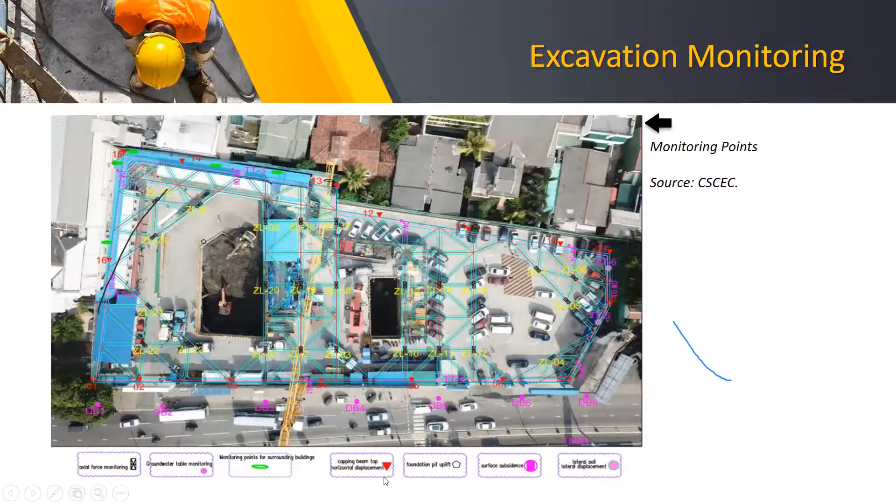So you can see this is the ODEL site. Now these are the two openings we made in the concrete slab for excavation purpose. You can see a lot of monitoring points are there, and these are the inclinometer readings. At the bottom level it is always zero.

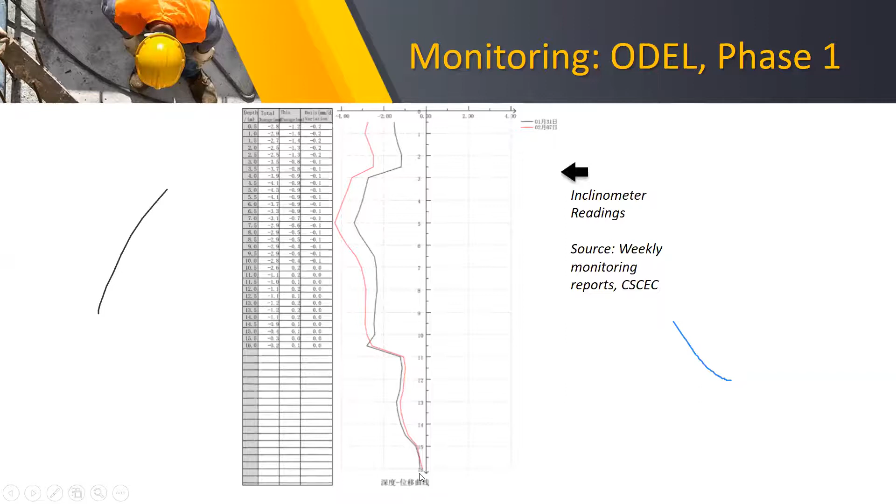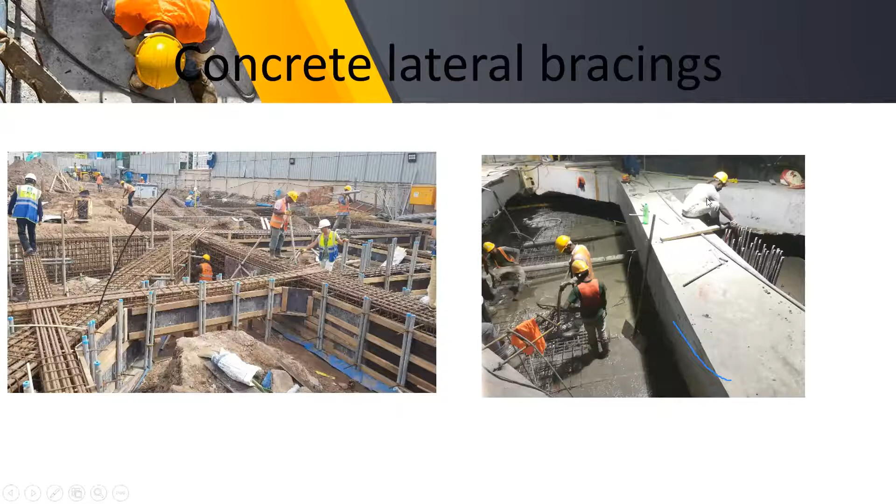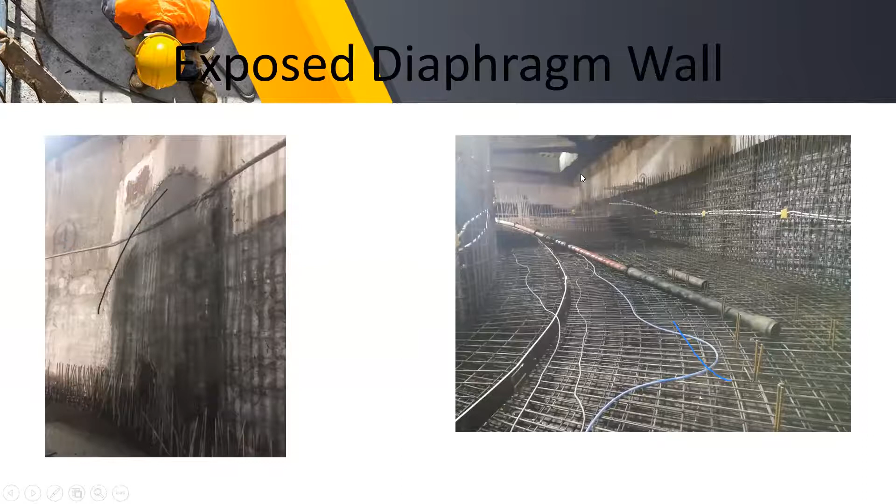While we are coming up, these beams we have to cut and remove. So this is the diaphragm wall. Once it is excavated, this is how you see the diaphragm wall. Now this is the ramp area we are now coming up to.

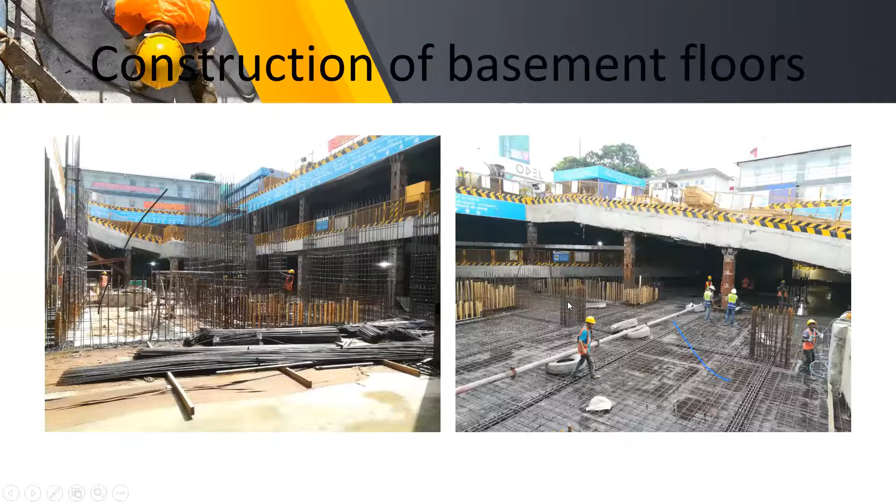This is ODEL building with the opening here. And now this is at basement level 3. You can see the basement construction is now going up.

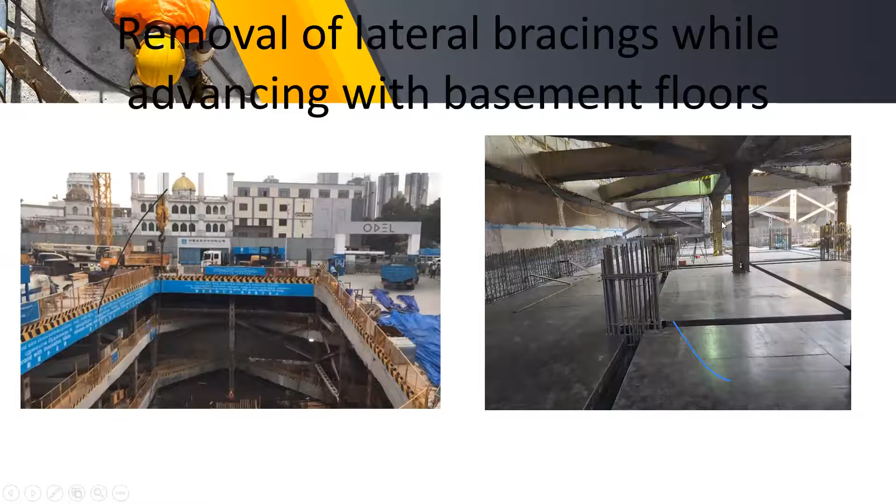This is ready for formwork. These are the concrete beams. You can see these concrete beams are sitting on steel columns, called king posts.

And that is all about my presentation. Good practice needs to be developed and introduced to our country, our industry, because we have to use our model. The technology is there, we should develop to suit our country. Always you have to take challenges to develop this country, and all our civil engineers, some practicing engineers, some students, we have to play a major role as engineers.

And remember, I always encourage people to start your own practices. Entrepreneurship is the one that should be taught in universities, it should be a subject actually. Because otherwise, once you pass out, you go and do strikes asking for jobs, instead of being ready for entrepreneurship. Don't think that only rich people or people having contacts can do practices.

When I came to Colombo 20 years back, I didn't have any contacts. I had some relations, friends, but they were not rich or influential. So I started working with people and built up contacts. Becoming a consultant or a contractor is not a difficult thing, you only have to determine to do that. I'm sure all of you also will be getting something to do for the first time in Sri Lanka. Not a basement, because I have already done it, but there are many things you can do for the first time, so please be prepared for that.